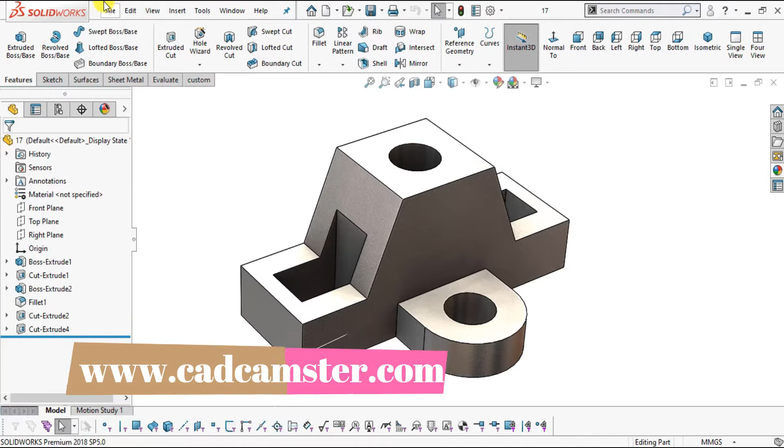Today we will design this part. It is a basic part in Solidworks 2018, meant for beginners. This is our tutorial number 17 on part number 70.

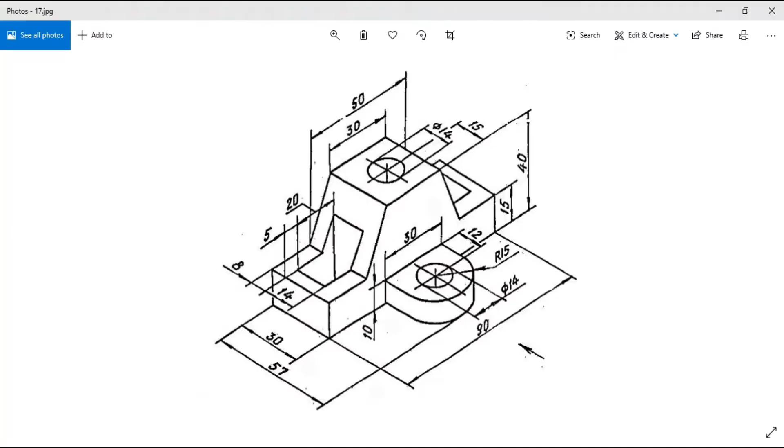First I am going to use this drawing to create this part. All these dimensions I will consider in millimeters. There are several approaches to create this part. Either you can create a rectangle of 40 by 90 and then create this profile and remove the excess material, this side material. Let me show you.

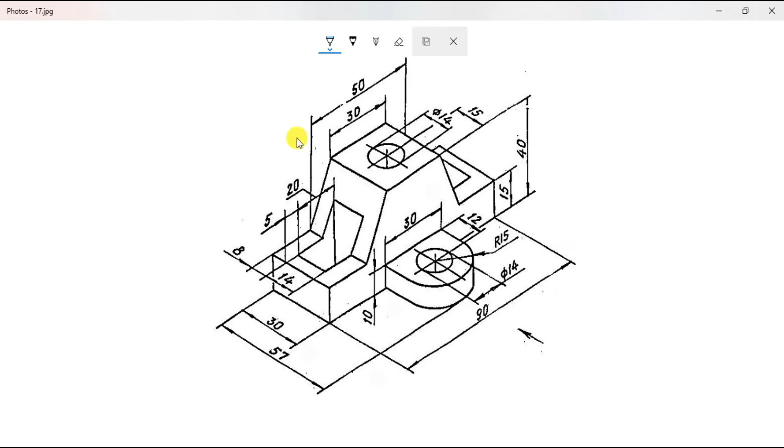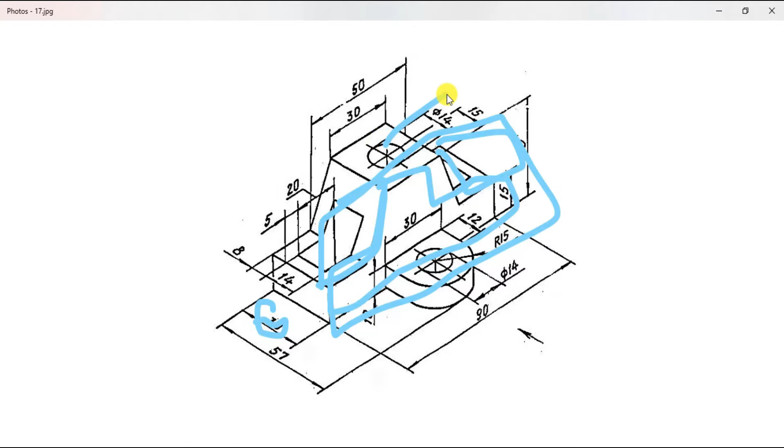Now you can create this rectangle, then remove this material and this material, or you can directly create this profile and extrude it up to a distance of 30 millimeters. After that you will create these 14 dia holes and this contour, and after that we will create this cutout.

So let's get started.

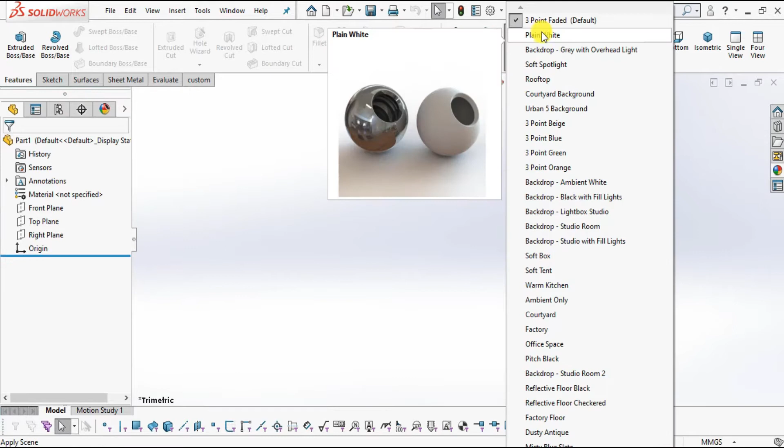Now first I will enter into the part mode. For that, select file, now select new, now select part, click OK. Now let me change the background to plain white and select the millimeter gram second system. Make sure you are working under millimeter gram second system.

Now you can either select extrude boss base - when you select it, it will ask for the plane, and you can select a plane - or you can simply directly select the front plane and go to sketch, select sketch.

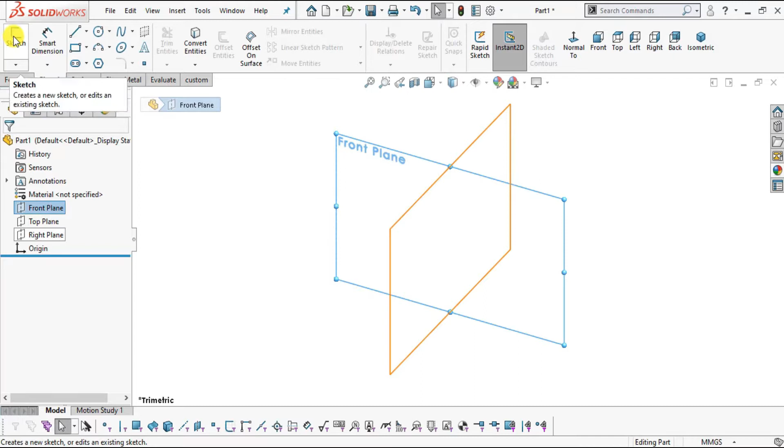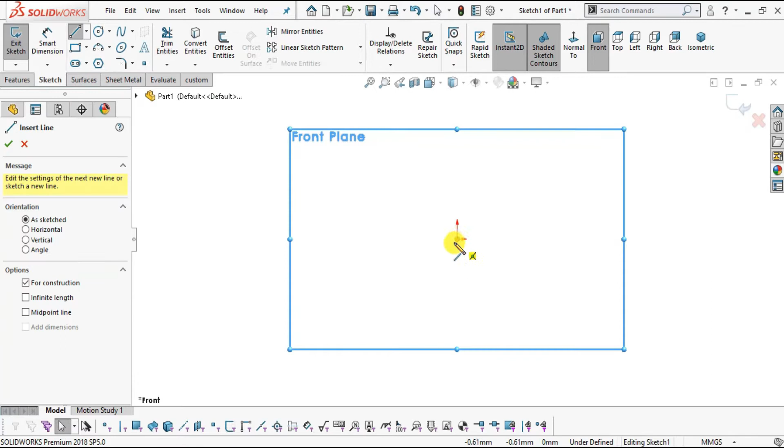Now first what I am going to do is create one center line and I will create this half profile, and later on I will mirror it. Now the height of the center line will be 40 millimeters. So select center line and create one center line like this.

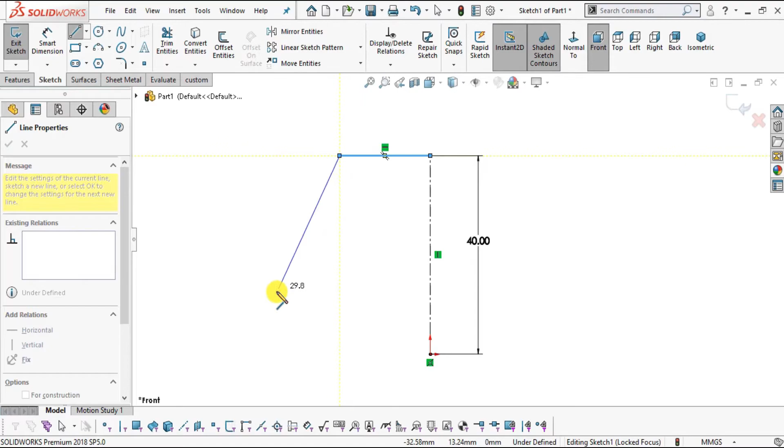Let me turn off this sketch numeric input. Now go to smart dimension, select this line, enter the value of 40 millimeters like this. Now again select the line command, snap this point and create this profile like this.

These two lines - this one is vertical and this one is horizontal, this one is horizontal too, but this line is not horizontal. Select it and make it horizontal.

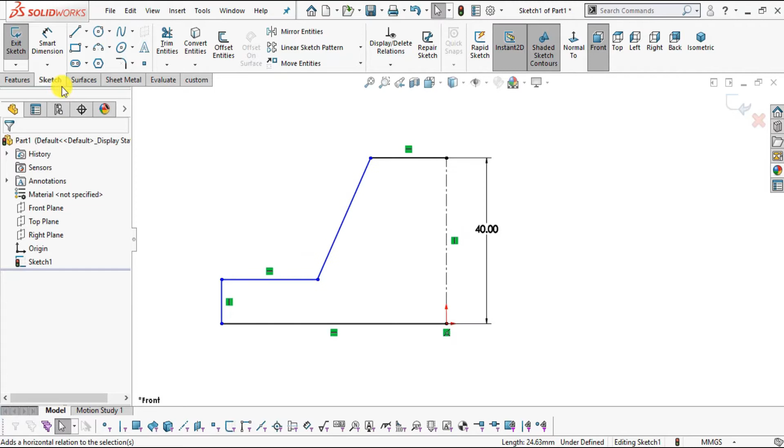Now go to smart dimension. Now we have to assign some dimension. You can see the base length is 90 millimeters, so select this one - this will be 45, half of 90. Now this distance is 15 mm given here. Select this edge, this will be 15.

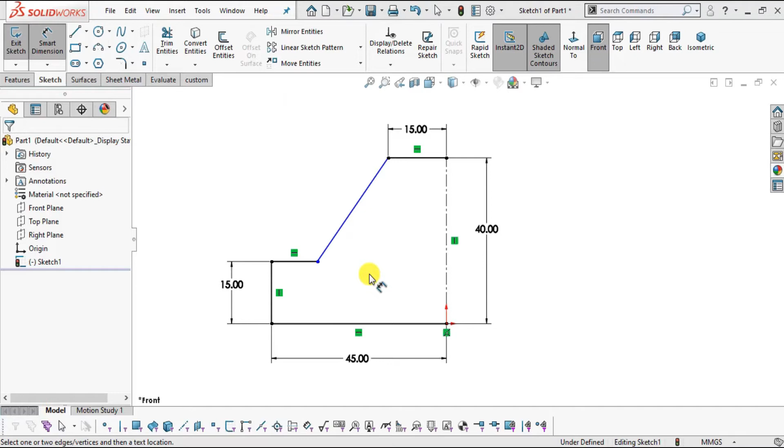Now the top distance is, you can see, 30 millimeters. Select this one, so this will be half of 30, which is 15. Now from here to here it is 50 millimeters, so select this edge and this center line. This total distance is 50, so this will be 25.

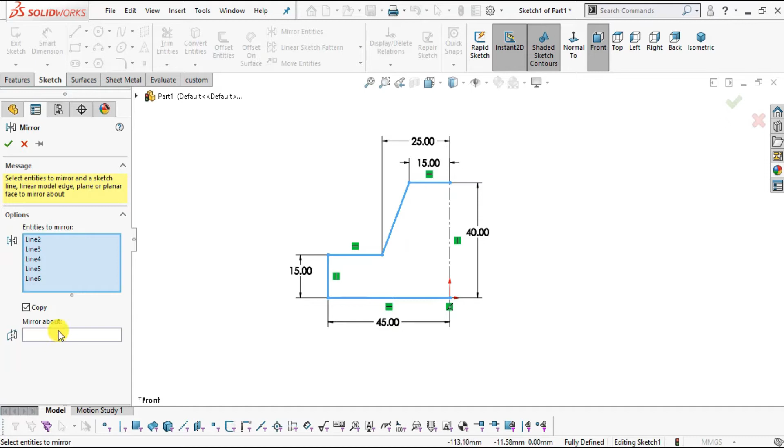Now you can see our half sketch is fully defined. Now we will use mirror entities. For that, select mirror entities. Now you can drag and select all these, or click by putting your cursor on these edges or lines. Now select this mirror about and select this center line as the mirror axis. Now click OK - now you can see our profile is ready.

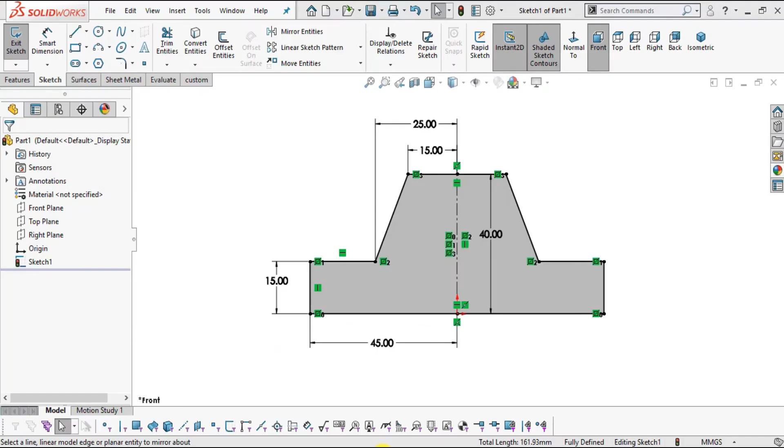Now we have to extrude this profile, and the extrude distance will be 30 millimeters, which is mentioned here, and we will use mid plane to extrude. Now select extrude boss base. Now select mid plane and enter the value of 30 millimeters. Now click OK.

Now we will create this profile. You can see first we have to create a 30 by 10 rectangle and extrude it up to a distance of 57 from this edge, or from this face it will be 27 because this is 30. So 57 minus 30, which is 27. So we will extrude it 27.

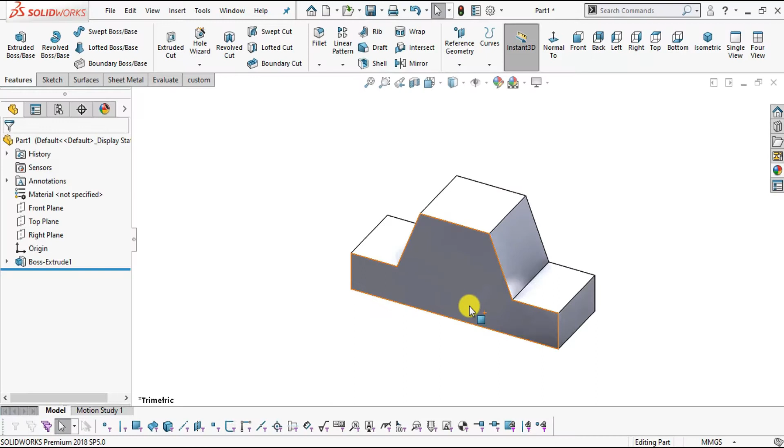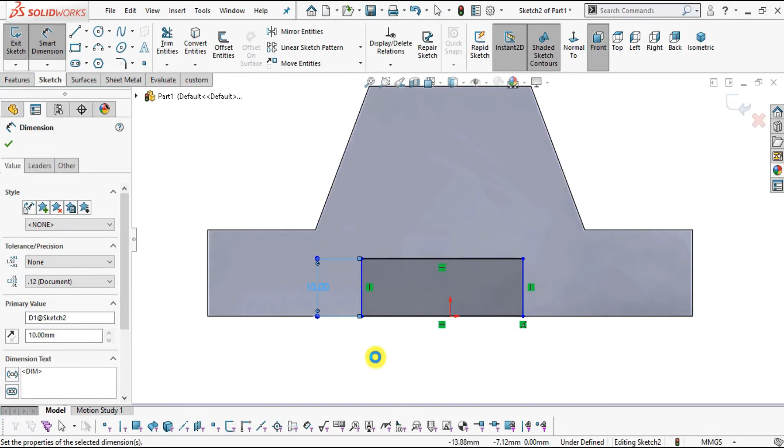So select this face, click normal to, and select sketch. Now select corner rectangle. Create one rectangle - make sure its lower edge is coincident or collinear with this edge. Now go to smart dimension, select this edge, this will be 10 as per the drawing. Now this edge will be 30.

Now we have to make it symmetric. So select this edge, select this origin point - from origin point it will be 15. Now go to features, select extrude boss base.

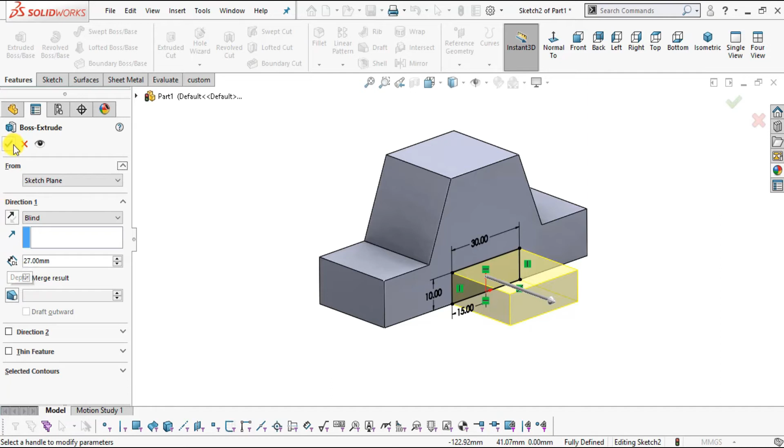Now the distance will be 27, which is 57 minus 30. Enter the value of 27. Make sure you check merge result here, otherwise if it is not checked it will create multi bodies. Click OK. Now we have to use the full round fillet.

For that, select fillet and select full round fillet. Click on the first box, select this face. Click on the second box, select this face, click on the third box and select this face. Now you can see the preview. Click OK.

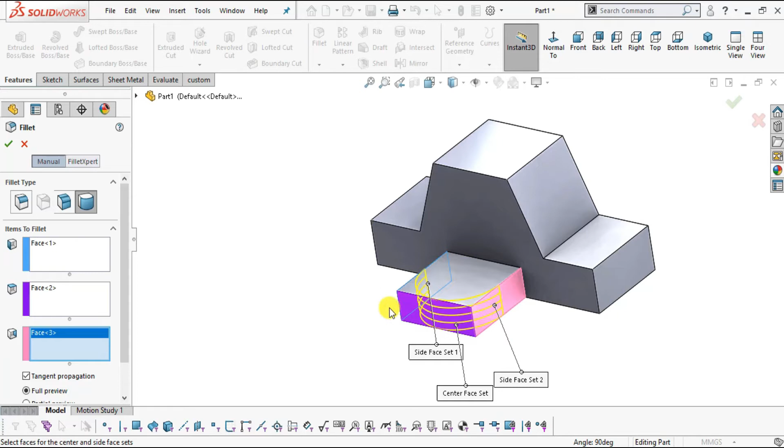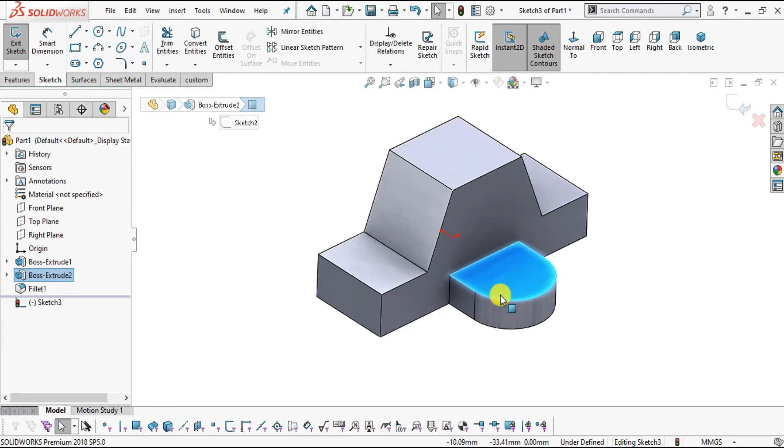Now we have to create this hole of dia 14 mm. It is concentric with this arc or fillet center. Select this face, click sketch and normal. Select the circle command. Let me escape it. Now select your circle command.

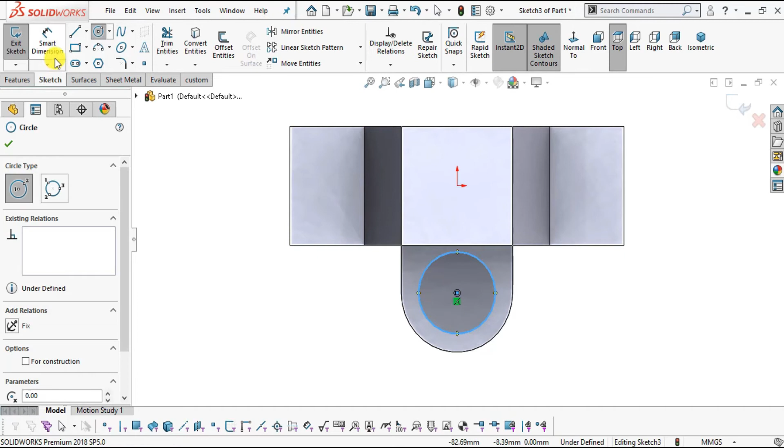Move your cursor towards this edge of the circular arc. It will show you the center. Now snap this center and create one circle. Go to smart dimension, select this center. This will be 14 mm.

You can see, and from this edge it is 12 mm. However, it is fully defined, but if you want to verify, you can select this edge and this center. You can see this is 12, but we cannot dimension it because it will over define the sketch. You can see it is showing.

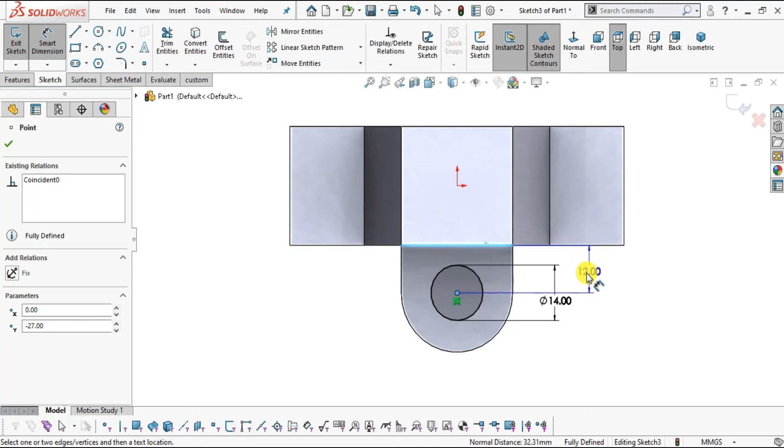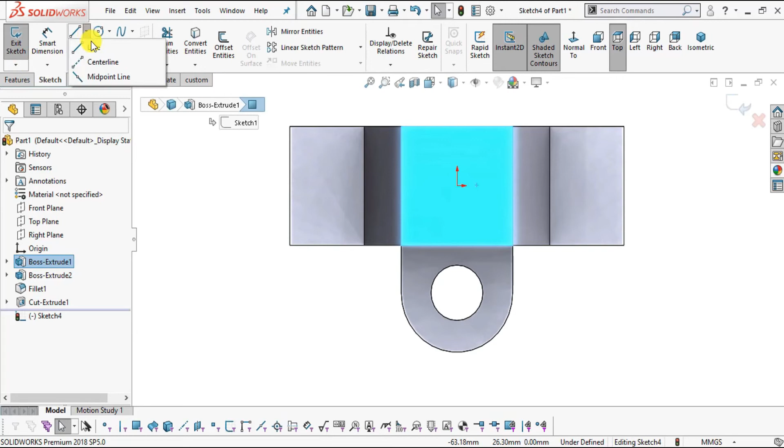Now go to features, select extrude cut and select through all. You can see. Now I will select this face, click normal to and sketch. Select your center line, snap this point and this diagonal point, and create one center line.

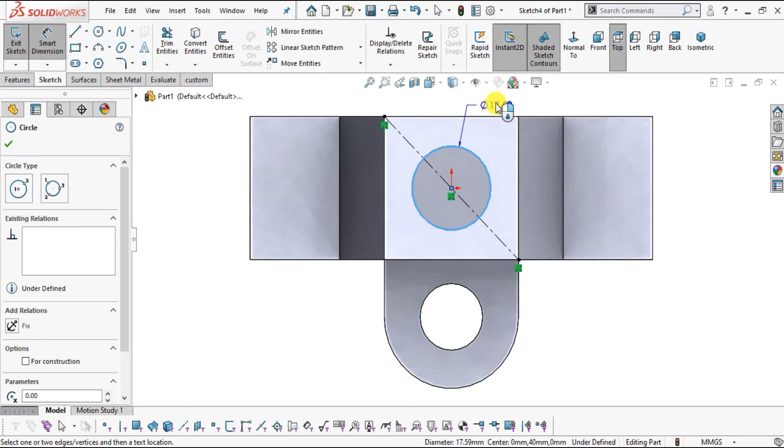Now select circle. Snap this origin point, create one circle. Go to smart dimension. You can see the dia of this circle is 14. Select this circle, enter the value of 14 mm.

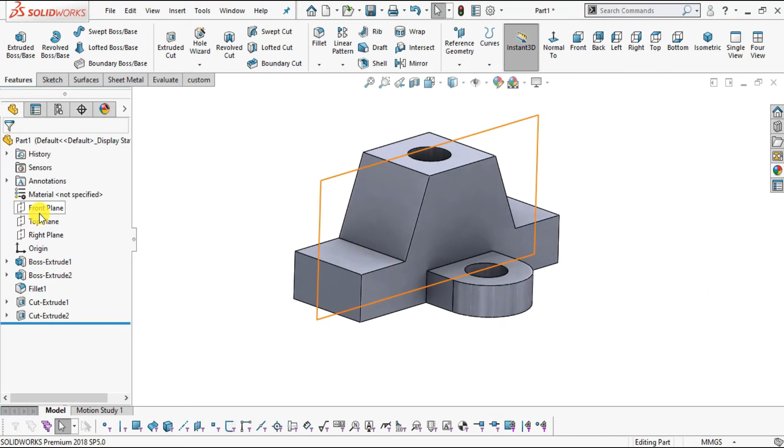Now we have to create this cutout here. For that I will select this face, click normal to and sketch. Select your corner rectangle, create one rectangle up to here. You can see from this edge up to this edge it is actually a rectangle on this face, due to which this cutout on this tapered face is done.

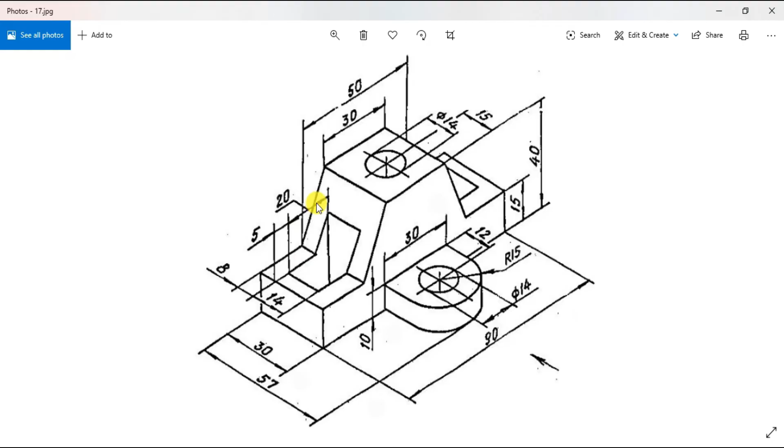So the length of the rectangle is 20. Select smart dimension, select this edge, select the smart dimension, select this edge. This will be 20. Now from this edge it is 5. Select this edge and this edge. This will be 5.

Now from this edge it is 8 mm. Select this edge, this edge. This will be 8. And this width will be 14. Now select this one, this will be 14.

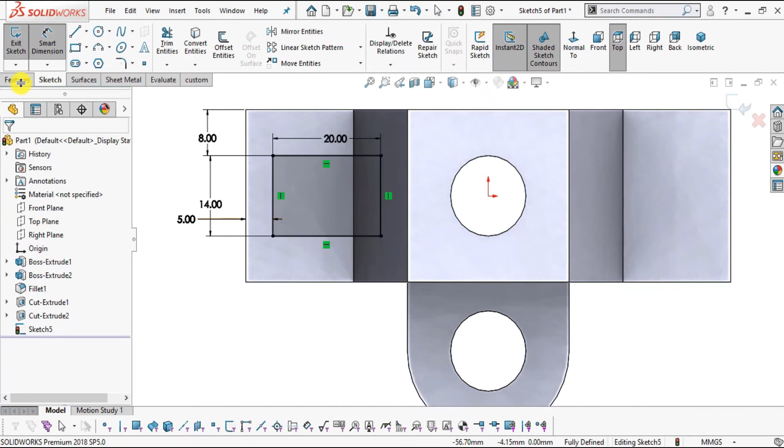Now go to features, select extrude cut. We have to specify two directions. Select direction number 2, and in direction number 1 select through all, and in direction number 2 select through all. Click OK.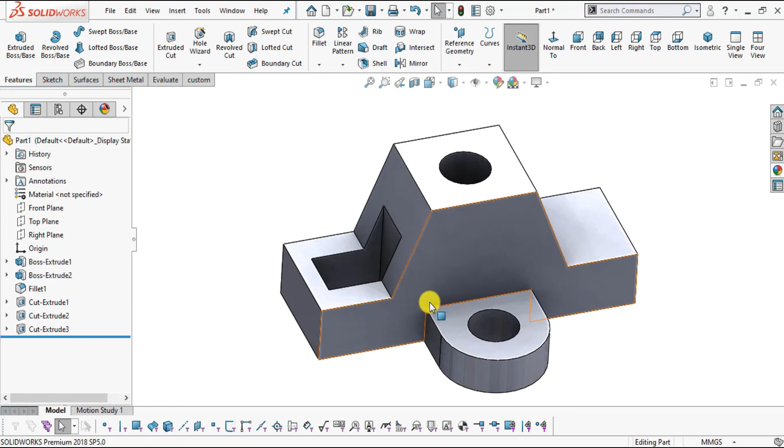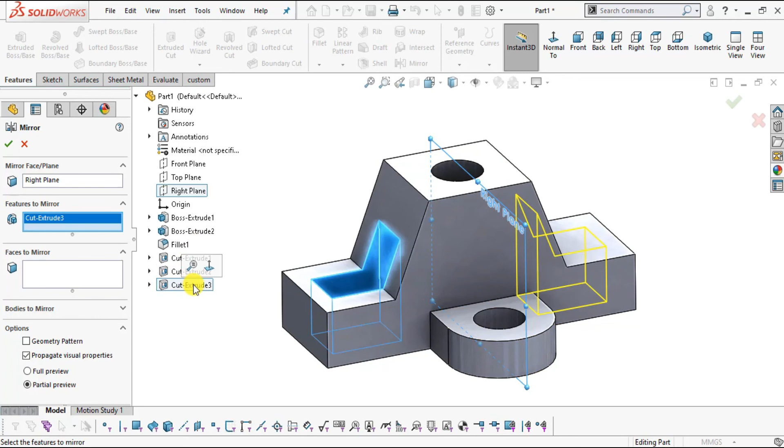Now you can see a smooth cutout. Now we have to make this cutout on the other side. For that I will select the right plane, select mirror. You can select this cutout, or you can click on this icon and expand this and select this cutout extrude number 3. Click OK.

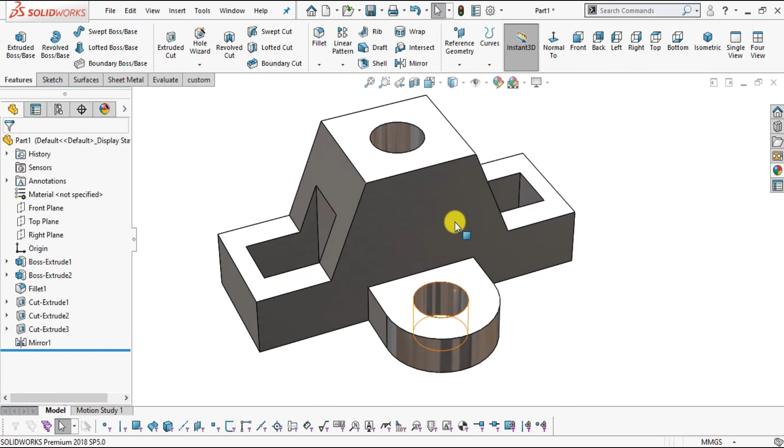You can see our part number 17 is ready. In this way we can create this simple part in SolidWorks.